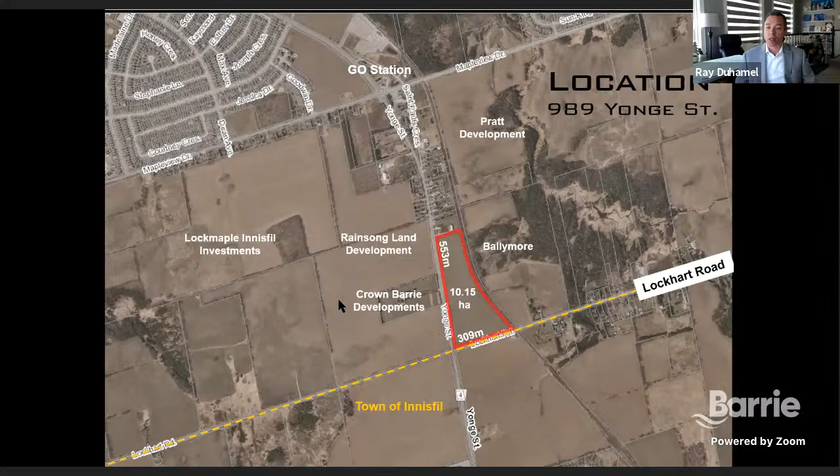I think the application, hopefully you'll find it tonight, I'm excited about it because it represents a fairly significant departure from the historical way of developing in Barrie and in typical suburban neighborhood development.

This is mixed use and high density development along a new Main Street area in the Hewitt Secondary Plan area. I think both the provincial policy statement and the growth plan speak directly to this type of development, maximizing the use of infrastructure, putting growth where it should go along transit routes to support both transit and major transit centers,

stations like the GO station to the north. It's, as I will speak to in a few minutes, located in immediate proximity to a number of community facilities. Overall, from an environmental protection perspective in the Lake Simcoe Protection Plan, there are no natural heritage features on this site, and the site will be developed in accordance with best management practices for stormwater management, including the use of low impact development facilities.

Before I begin, I just wanted to highlight a whole raft of studies. I won't speak to these at all, of course, but they're all available at the City of Barrie if you contact the Development Services Department. These are the master plans that were prepared and have been, in many cases, updated since the original planning for the Hewitt's Secondary Plan area commenced in 2010.

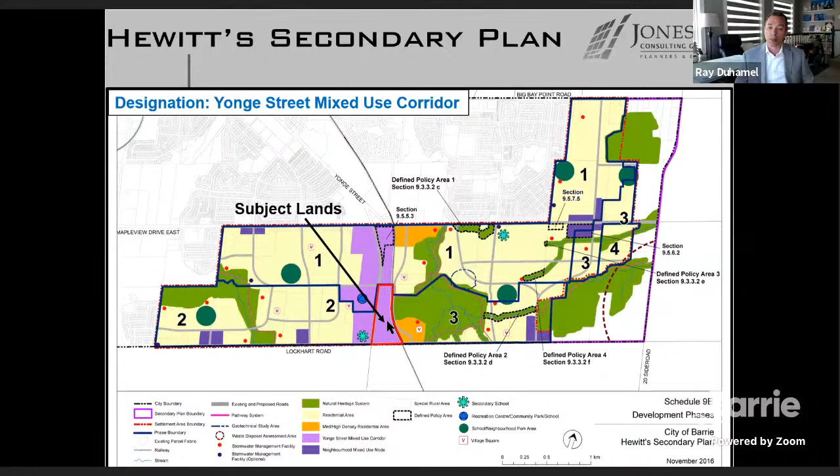You'll have seen at least one application before that's previously been approved. That's one over on the far west here. And this is the first application that's coming before you now for approval.

This is the Hewitt's master plan, which is an appendix to the secondary plan. There's, of course, no municipal roads that are proposed in this area. It was always intended to be developed with private services, private roads and private driveways, of course, but it is relevant to point out a few areas immediately across the street in the draft approved Rainsong subdivision.

There's a community park and a recreation center, as well as a public elementary school. And then immediately across the street, there's a planned Catholic high school. So this development will be in proximity to other high density development, both to the east, which is this orange color, as well as other high density development along the Yonge Street corridor, in addition to a number of community facilities in immediate proximity.

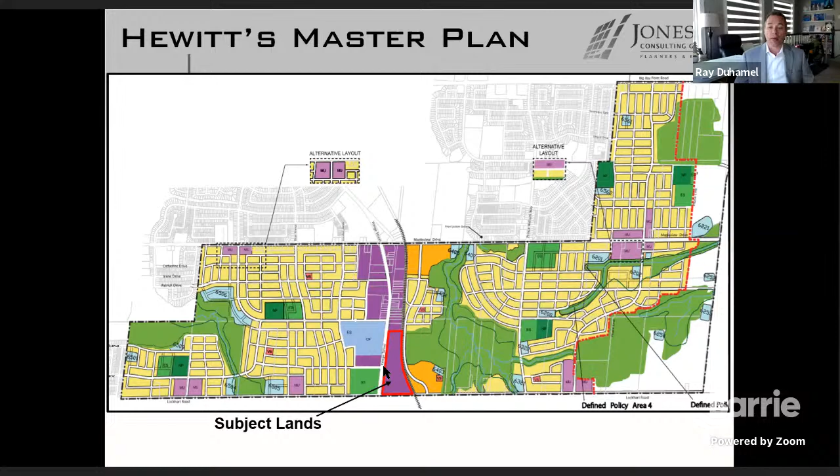Lastly, there's a road connection that comes along the top end of the school and connects out into Yonge Street. And we've aligned the primary entrance to the site to align with that adjacent road intersection.

In short, this is a fairly straightforward rezoning application, Your Worship, members of council. We're proposing to zone the lands neighborhood mixed use in accordance with your approved zoning framework for the Hewitt Secondary Plan area. And we're not asking for any special provisions as part of that application.

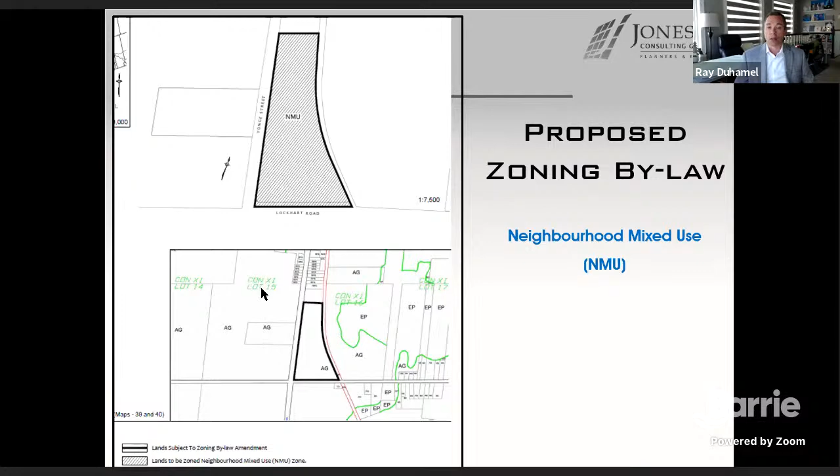The current zoning on the lands is agricultural in accordance with the remnant Town of Innisfil zoning bylaw that remains in effect until the lands are rezoned.

We did undertake a number of technical studies, as is typically the case. All of these studies are on the city's website and are available for review from anybody who is interested in these items, and they include everything from hydrogeological and noise studies to shadow study plans and boundary and topographic surveys.

So to the meat of the application, this is the site plan that has been developed to support the zoning application. This isn't just a pretty picture flashed in front of you with hopes of going through a rezoning process, then you'll see something drastically different going forward. Subject to comments from everyone at the table, the public process, staff and agencies, the intention is to move forward with a site plan application once concerns are addressed.

This is effectively a mixed use development. I mentioned the alignment of the main street, so I'll speak first in terms of pedestrian and traffic flow. Here's the primary entrance, opposite where the street will connect to the lands immediately to the west. The intention is to have a circular drive system on the south end of the plan, and a crescent road that connects out to Yonge Street, hopefully connecting to the future recreation center and library driveway anticipated across the street.

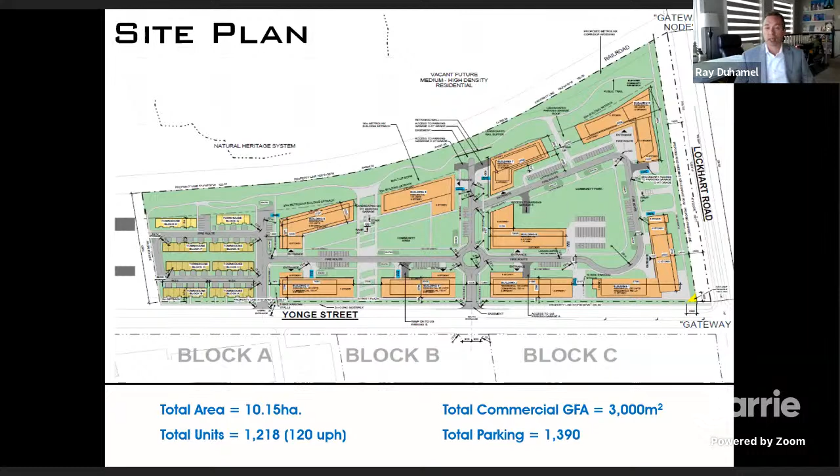If you're interested, I just broke out the stats at a quick glance, happy to answer any questions. I wasn't going to speak to each one, but most buildings have different unit sizes, different heights, and step backs that have been integrated, from the tallest working through to the townhouses at the very top.

Looking at underground parking, there are 1,167 residential and 22 commercial stalls underground. So the vast majority of parking on the site is underground, with only 97 residential stalls including townhouse garage stalls, and 104 commercial stalls up on the surface.

So here's the design and renderings we want to present over a few slides, and then that concludes the presentation. Both Lockhart and Yonge Street will be widened and upgraded in accordance with your capital plans. We've taken the liberty of showing widened space for illustrative purposes only. The intent is to give an overview of how the site conceptually and massing will be put together.

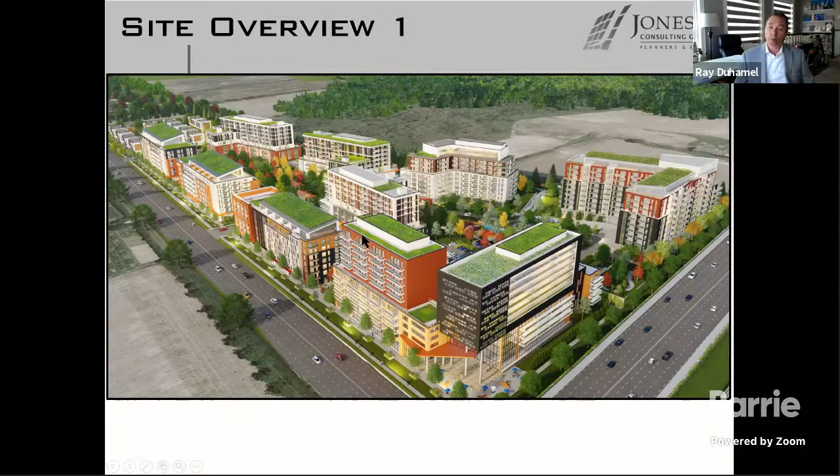This is the other gateway bird's eye view. Again, this is the rail line heading north, and this is Lockhart Road on the bottom of the screen. This illustrates the passive use of a berm that will be constructed - a derailment containment berm, effectively, that will be built adjacent to the rail line. And then you can see the massing of different buildings throughout the site.

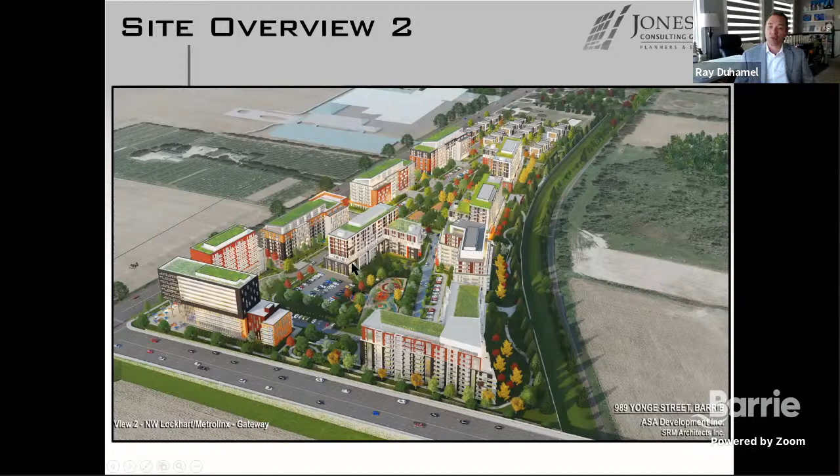This is the last image. It shows the more interior spaces to give you a sense of magnitude - this is the smaller space, mind you - coming in from the primary entrance off of Yonge Street into a traffic circle. This is the smaller of the amenity spaces at the ground level that have yet to be programmed, but there's plenty of space and opportunity to integrate very usable space that will be available to the residents.

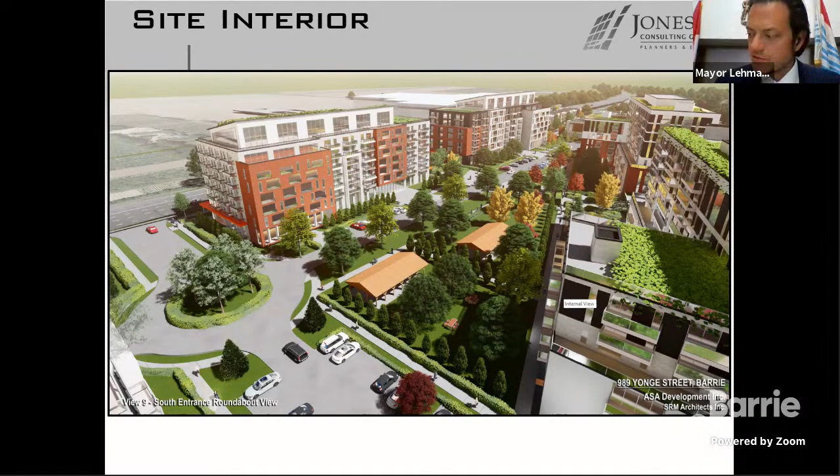Further to Mr. Duhamel's presentation, please be advised that planning staff are completing the technical review process. A neighborhood meeting was held on October 29th, and no members of the public attended this meeting.

Staff are currently reviewing the appropriateness of the application, in particular the following matters: conformity with the Hewitt's secondary plan, including the proposed density and the interface between the existing and anticipated development in the area; site servicing, grading, and drainage as it relates to the master plan studies prepared for the Hewitt secondary plan; and the overall functionality of the site as proposed, including such matters as pedestrian and vehicular circulation.

Staff will continue to work with the applicant and their consulting team to address any feedback received through the public consultation process, as well as any comments raised through the analysis of these applications by technical staff and our agency partners. These items may require some revisions or updates to the plans and studies submitted.

All comments and questions from the public during the technical review process, including all the calls, letters, emails, and what we hear tonight, will be included, addressed, and answered in the planning staff report. A staff report providing a recommendation to Planning Committee on the proposed zoning bylaw amendment application is anticipated to be brought forward in the fall of 2020.

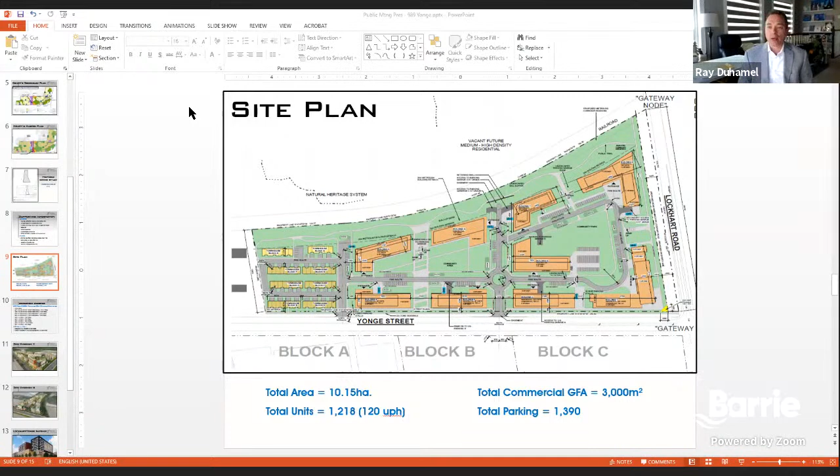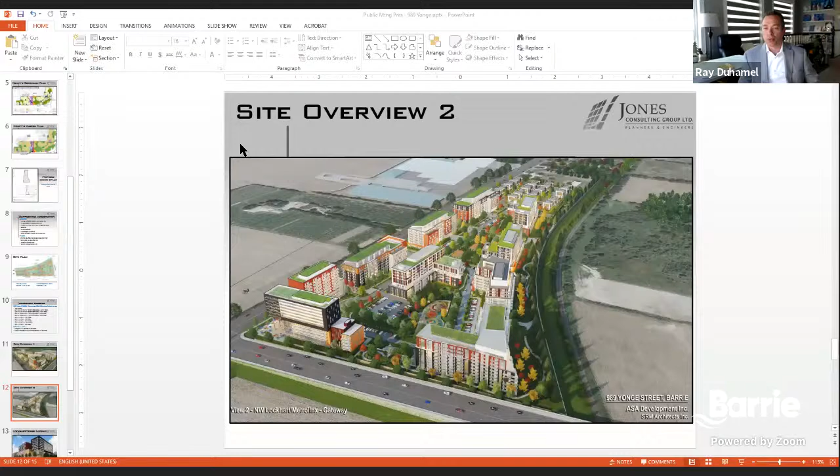Okay, well, there's a few questions there, Your Worship, through to Councillor McCann. The vision is, as tried to be articulated in the actual renderings themselves, and I will flip a few slides to... actually. So excuse me for this. There, the intention is to create a very interesting space.

The word high quality is thrown around quite easily in the development world. What's high quality? Is a great long-lasting material, or is a great long-lasting material that looks great to some and not to others? What the intent is to have is high quality material in the context of making sure that it's durable and maintenance free, so that it's not peeling or looking poorly after 5 years or 10 years time, to provide variation in windows and glazing.

So this isn't just a pretty picture of the intention design here. Of course, it's going to be vetted in much further detail when we get to site plan approval, but there's a method to the architect's madness, and the architect may be on the line and he can speak to anything that I've missed. You can see that the glazing is quite different on this building versus this building, which has a more traditional feel to it, which is quite different from the inward balconies in this area, which are somewhat more reminiscent of some more upscale apartments in Toronto.

So high quality to me speaks to the use of the space, making sure that the materials, there's a variation of materials, variation in glazing, there's interesting space so that there's setbacks, step backs in the building, that there's architectural details that are different, and a more welcoming space for pedestrians to walk along the street. That's how I think we develop high quality.

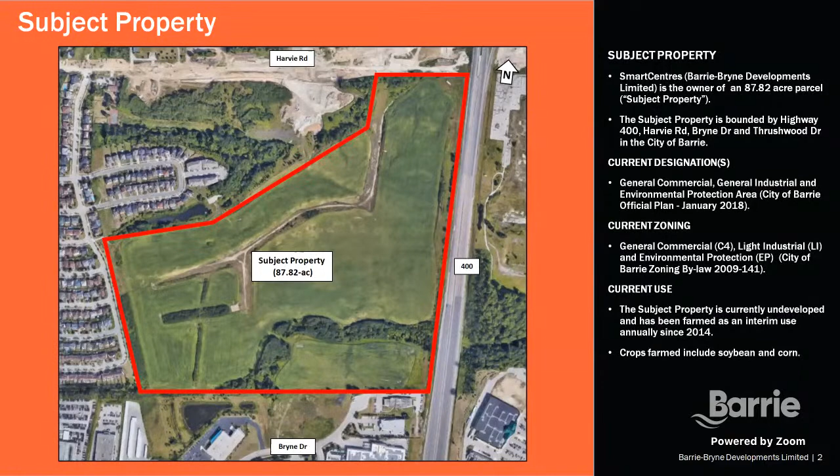So the application will allow for the continued farming of the property. This is an interim use. It has never been applied for as a long-term use because we do envision development here one day. But as that is not in the cards at the moment, we are continuing to farm the property until future development comes to fruition. This application does not seek or result in any changes to the existing land permissions on the property, so we're not looking to rezone anything, and it does not seek any development. Once again, it's just to continue farming the lands.

And that is my presentation. Thank you very much.